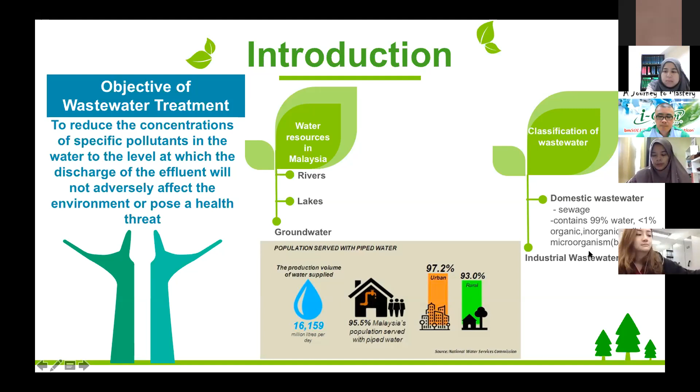So what is the source of water pollution? I've divided it into 4 main sources, focusing on Malaysia, but generally the trend is similar all over the world. The first is due to population growth, increase in commercial area, and urbanization. As population increases, especially in cities, more water is consumed, resulting in more wastewater produced. Besides that, more population means more solid waste produced, which ends up in landfills. Normally landfills in Malaysia have poor wastewater treatment, and most of the time the waste in the landfill leaches into underground water and surface water. This is happening currently in Malaysia, and it's very alarming.

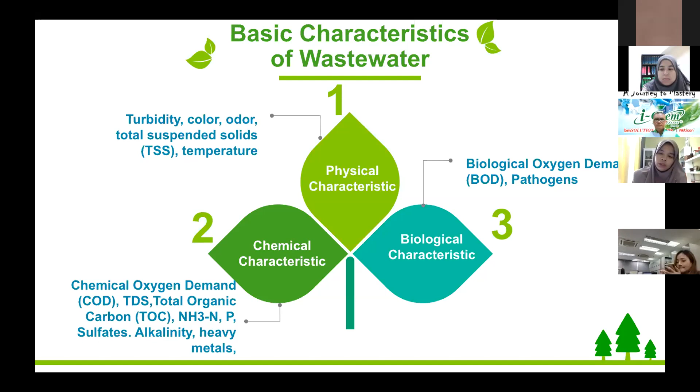So this is about the water pollution sources by sector in Malaysia. This data I took from the Environment Quality Report from DOE in 2017, which was released last year. In Malaysia, there are 5 main sectors that pollute the water.

The first one is manufacturing industries. Normally the characteristic of wastewater produced from this kind of industry includes heavy metals and high suspended solids. The second one is agricultural-based industry.

Like farming, and the use of pesticide and fertilizer. Normally this kind of wastewater has high COD, BOD, and nutrients. When we talk about nutrients, we are actually talking about the contents of nitrogen and phosphate. By having high nitrogen and phosphate, we know that fertilizers and pesticides, those kinds of chemicals used in agriculture, contain this high nitrogen and phosphate. This will cause eutrophication.

And then the third source comes from animal farms, especially piggeries. It has also the same characteristics: high COD, BOD, ammoniacal nitrogen, and also source of pathogens and nutrients.

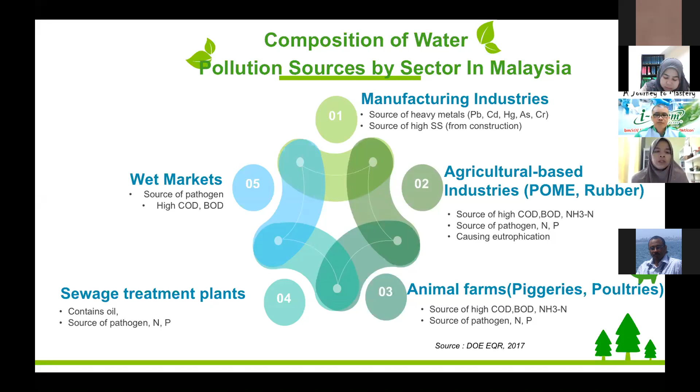So here we see some trends of suspended solid, BOD, and ammoniacal nitrogen loads that are produced by the 5 sectors I just mentioned.

We didn't realize the chemicals we use, the bleaching, the antibiotics that we took, all go to the sewage. And then transportation, oil and grease, heavy metals, especially during rainy days, all get washed off and go to the sewage. That's why our sewage is the main contributor to this polluted water.

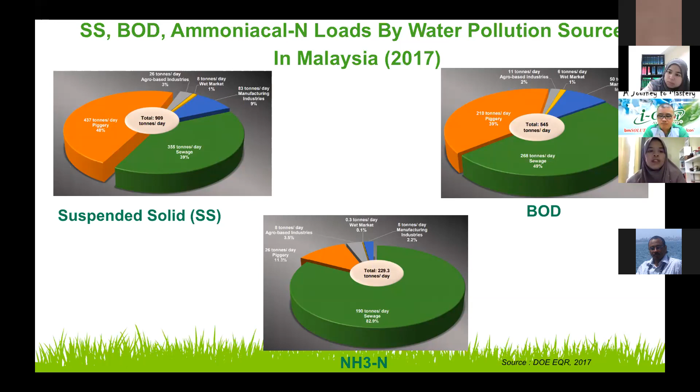So these are the challenges in wastewater treatment facing all of us, including the manufacturing industry, especially manufacturing industry. So there are five.

There are more, but these are the five main challenges in wastewater treatment. The first one, of course, is rising population, as I mentioned just now. The second one is climate change.

Malaysia has musim tengkujuh, rainy days, and this affects wastewater treatment. Wastewater treatment plants also use high energy consumption. The fourth challenge is complying with legislation set up by our government. The fifth is lack of appropriate technologies, which is faced by the whole world.

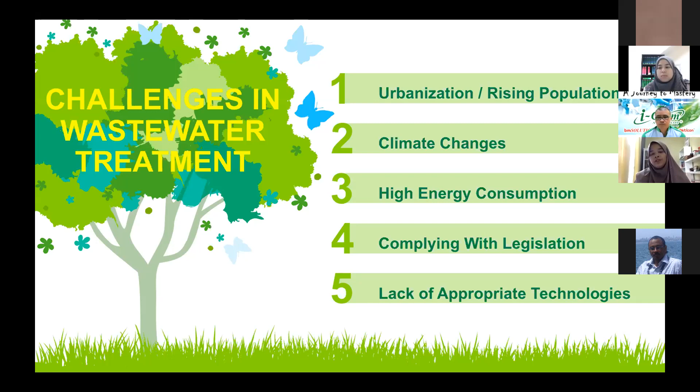So all these five challenges are giving you high costs. In the end, these five bring you to affect your cost, right? So I did some elaboration on all five challenges.

For the rising population, especially in urban areas, the city, with increase of people living in the city comes increased water consumption and producing more solid waste. When solid waste doesn't have proper appropriate treatment, it will end up in the landfill, and this is more dangerous. It will potentially pollute your groundwater. The groundwater in Malaysia as a water source is only 7%. It is expected that in Asia, in 40 years it will double, causing serious eutrophication.

So nutrients, the name is nutrient. We thought it's doing good to our water. No, nutrient in wastewater is nitrogen, phosphorus. This will cause eutrophication, and it will affect your aquaculture, fisheries, and water quality.

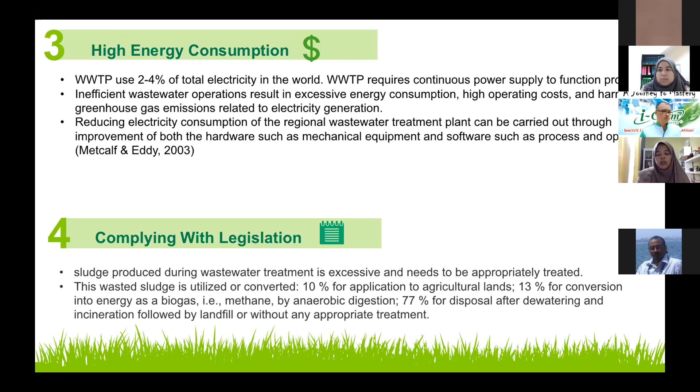The final challenge is lack of appropriate technologies, because some of our infrastructure in our wastewater treatment plants is outdated. It cannot cope. The effluent is double, but the technologies or the plant remain the same.

We also lack certified people, the competent person in operating wastewater treatment. This is not only faced by us in Malaysia, but all over the world, like India.

These are the impacts of poor wastewater treatment, like I mentioned just now. We are the main users - human, animals, and also for agricultural purposes. So all these will end up, human and animals will end up in sewage and go for wastewater treatment.

The agricultural side is also normally very rare to see - I don't have so much experience observing wastewater treatment plants in agricultural farms. But from what I've observed, they didn't have wastewater treatment, or if they have it, it's very poor. So they end up with all those fertilizers and pesticides used leaching to the underground water.

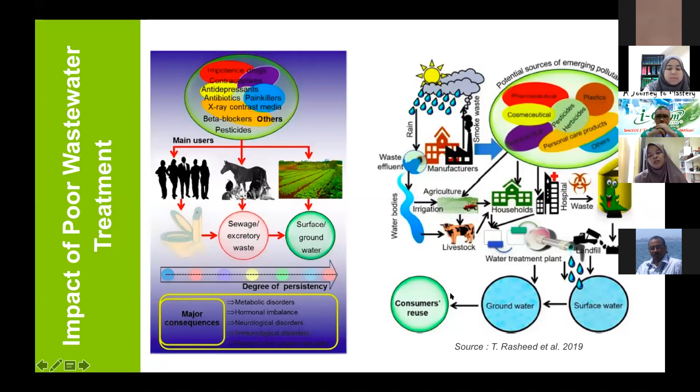Nowadays we have medicals, antibiotics, landfill leaching into the groundwater and surface water, agricultural runoff from animal farms - these are all causing water pollution. If you're not doing proper wastewater treatment, all these will go to our water resources, surface water, groundwater, and we are the ones who will be using the water.

Now the next one is the impact of wastewater: eutrophication. I've mentioned eutrophication earlier. Eutrophication is actually caused by the nutrients in the wastewater - nutrients like nitrogen and phosphorus. This nitrogen and phosphorus gives nutrients for the plant to grow, so we will have algal growth when you have more nitrogen and phosphorus.

When the algal growth becomes algal bloom - because the algae will use carbon dioxide and produce oxygen, and then when there's algal bloom, it will cover the water. This is what we call eutrophication: less oxygen, and that's where the quality of your aquatic life suffers - you will see dead fish. So this is not good.

So the next one - I have experience dealing with eutrophication in one of the process plants in Gebeng, where they had a problem of high pH in their facultative pond. When we saw it physically, the facultative pond was already full of algae. This indicates there's eutrophication existing in the wastewater. The source of the nutrient, phosphorus, actually comes from them using potassium hydrogen phosphate to prevent or retard scale formation and corrosion in their water distribution system.

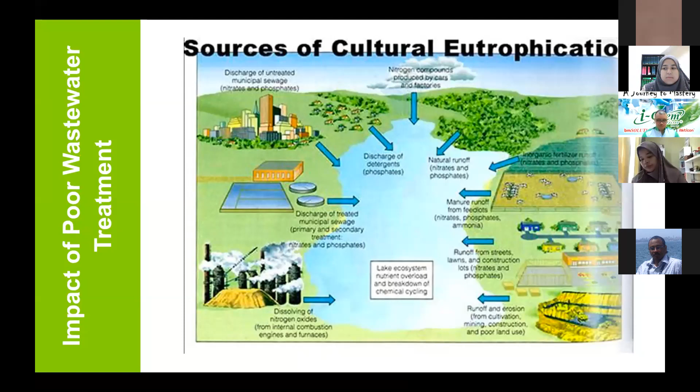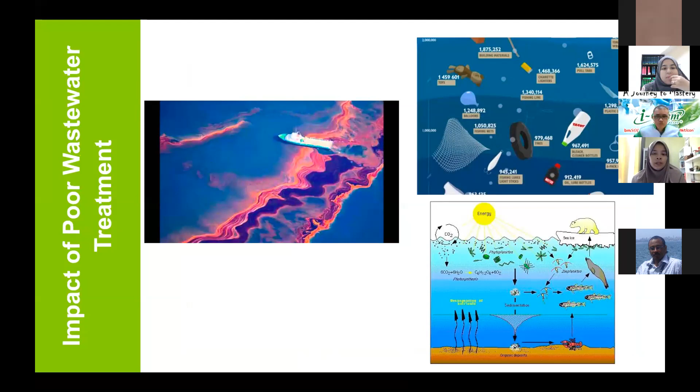These are another effect of poor wastewater treatment - if you can see, there's oil spillage. This sometimes happens, not often, sometimes might happen in the oil and gas industry.

So this is the basic wastewater treatment plant - this is just a basic one. Nowadays there's a lot more recent technology used to treat wastewater. Basically we divide it into three major parts. Actually, some of them have pre-treatment before the primary treatment, so it depends. But basically we have these three: primary, secondary.

And then the third one is how you treat your sludge, either before you dispose it in a landfill, or incineration, or you use it for other applications. Like I said, some plants have pre-treatment to remove large objects so that it will not damage the equipment, and then only they go to the primary treatment to reduce the fine particles, the suspended solids, and the grease.

In the primary treatment, if you see the settling tank, the solids will settle down, and this sludge will go to the sludge digester. The treated supernatant will go to the aeration tank - this is where we start our secondary wastewater treatment.

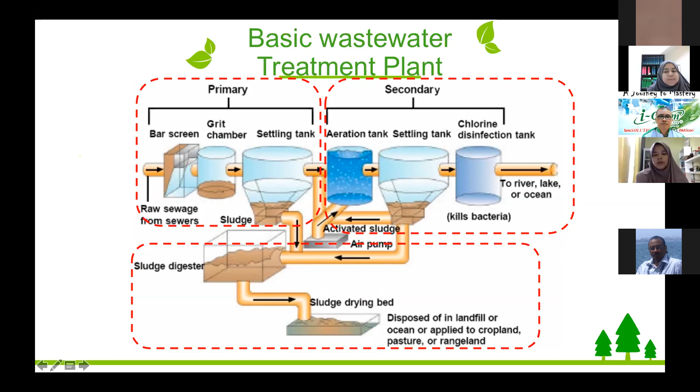Okay, so this sludge treatment will involve some thickening, stabilization, conditioning, dewatering, and reduction. So there's a lot of studies now on recycling back or reusing the sludge, to optimize the cost.

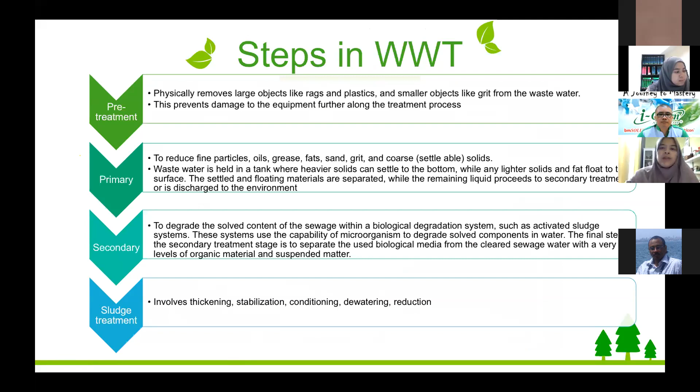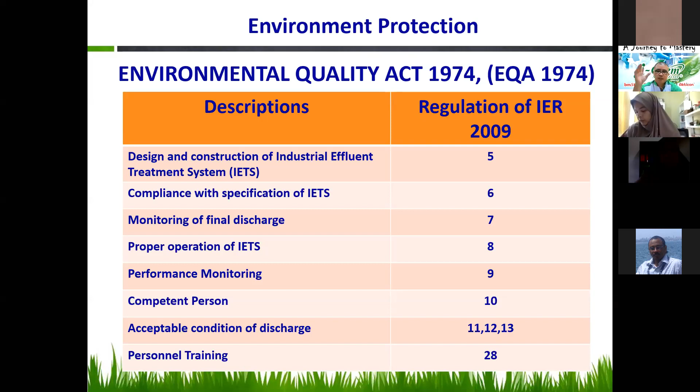But in the regulation of Schedule Waste 2005, all waste that falls into the schedule waste category must comply with all the regulations stated in this regulation here. I also highlight some that are quite related to our topic today.

The first one is regulation number 8, the responsibility of the waste generator. The factory or waste generator needs to ensure that all procedures of schedule waste management are in accordance with the DOE guideline. So when you produce wastewater and your wastewater produces sludge, when the sludge falls into schedule waste, make sure you follow the procedure.

And regulation 9 talks about storage of schedule waste. In this regulation, the factory or waste generator must follow the storage requirements for schedule waste, keeping the generated schedule waste not more than 180 days or not more than 20 metric tons.

And regulation 10 talks about labeling of schedule waste - the factory needs to label all schedule waste in accordance with the specification in Schedule Waste Regulation 2005. And in regulation 11, the waste generator needs to keep the inventory record for a period of up to 3 years from the date the schedule waste was generated.

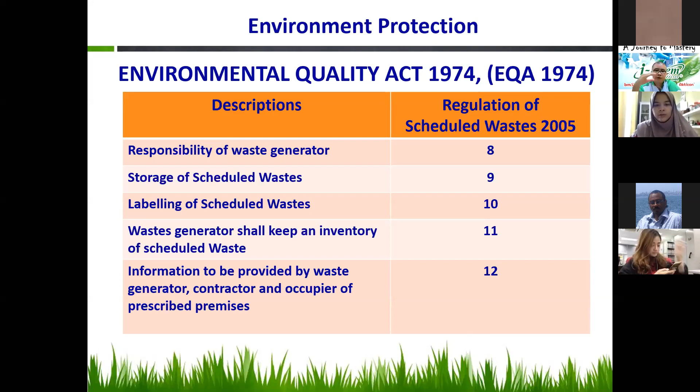Generally, there are a few proceedings that need to be carried out in industrial effluent management. These are the 4 proceedings that we always need to refer to.

The first one is the Industrial Effluent Characteristic Study, IECS, where we study the characteristics of the effluent. Second is the Industrial Effluent Treatment System design, IETS design. Third is the IETS operation and optimization. The final one that everybody is concerned about is the cost, so later I will share some cost-effective approaches in industrial effluent management.

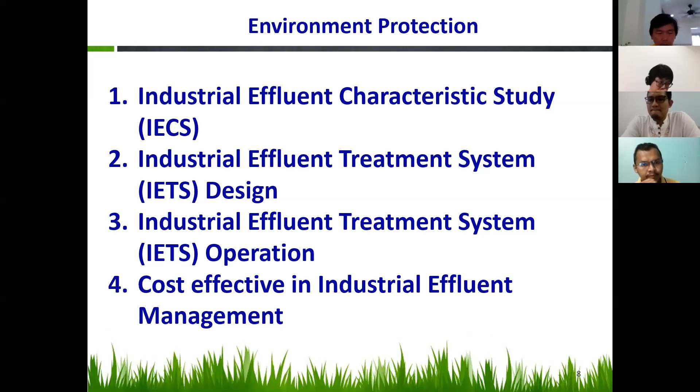All this testing can only be done by an accredited lab, accredited based on ISO 17025 under the SAMM scheme, Skim Akreditasi Malaysia. For labs that don't have this accredited certificate, we cannot use them for testing because they are not recognized by the DOE. So whatever IECS you want to do, make sure the lab you are sending the sample to is certified under ISO 17025.

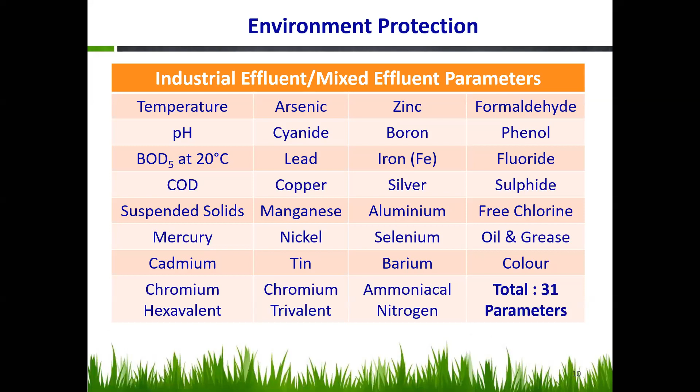Then the IETS will be designed based on the non-compliance parameters reported in the IECS report. When the testing is done, they complete this IECS report, and the consultant will select the non-compliant parameters. Then they use those parameters to design a system to comply with the standards stated in the DOE regulatory standard, according to the guidance document on design and operation of IETS.

As I mentioned, this document is issued by DOE, so all this design needs to refer to that guideline. I think almost everyone who goes for the competent person course will be provided with these two documents. This is one example of the ITS design calculation.

You can see all the unit operations like the aeration tank, air blower, primary sludge, biological sludge, and primary sedimentation. All these unit operations are calculated based on the factory specification and the flow they produce. They calculate each one by one for the entire IETS before moving to the engineering drawing.

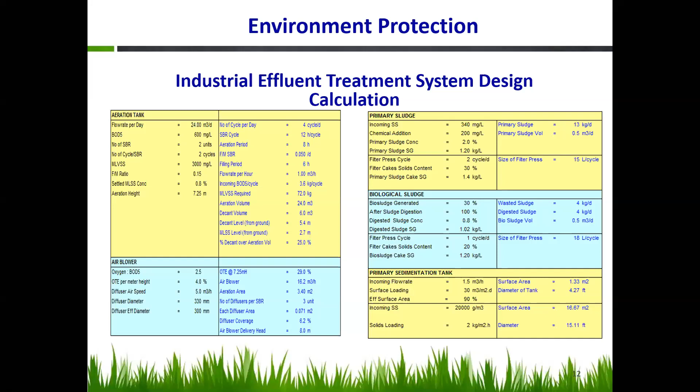Once the calculation is complete, the drawings will be prepared accordingly. This is one example of a drawing that the engineer will prepare, and this drawing will be used to construct the IETS. So this is our flow for this design and build process.

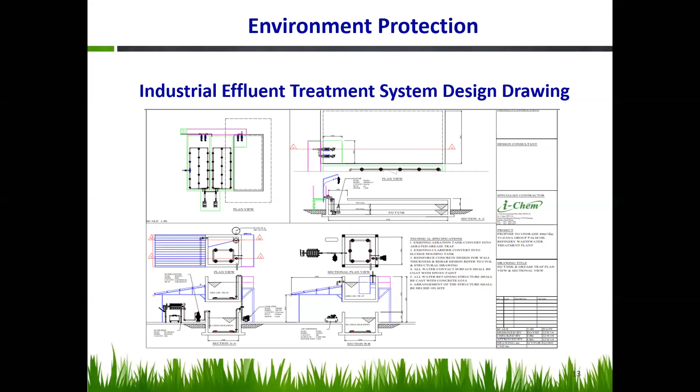After completion, the construction of the IETS needs to operate based on the system design specification and regulatory compliance. So the wastewater treatment system has been designed based on specification, then built. After building, it needs to be operated, so we need operation and optimization in this part.

In IETS operation, I selected 4 parts that are quite related to this topic. In ITS operation, the optimization of the entire ITS is crucial to ensure its effectiveness in treating industrial effluent for regulatory compliance. Therefore, performance monitoring of the ITS needs to be implemented by a competent person, assisted by the ITS personnel, especially the Environmental Performance Monitoring Committee, EPMC.

This committee, EPMC, needs to be formed in the factory and will be responsible for taking care of the wastewater treatment plant, led by the competent person. The EPMC needs to go through training by the competent person to make sure they are competent to do testing and daily operations in the ITS.

Prior to optimization of ITS, understanding the entire operation of ITS is needed to ensure it is well operated and controlled within the design specification. So when doing optimization, make sure the whole unit operation of ITS is understood - what systems are inside your ITS, because the various technologies or systems used are subject to your process flow.

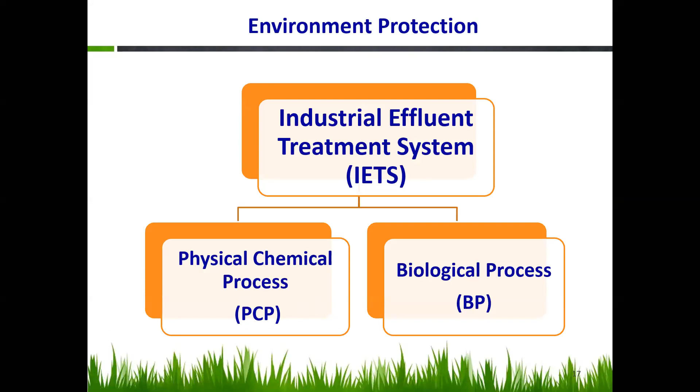In physical chemical process, PCP, the main function is to remove suspended solids through coagulation and flocculation using coagulant and flocculant. For those with a metal issue, normally caustic or lime will be used to precipitate the metal out from the influent. This is common practice in the industry for the PCP side.

For the BP side, the dissolved organic matter needs to be removed in this biological process, namely BOD and COD. This will be removed biologically by activated sludge, which consists of bacteria and microorganisms. So these are the two main functions, PCP and BP.

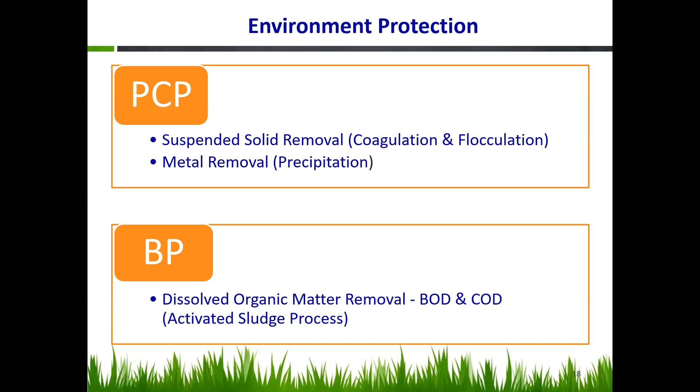From the design process flow, we can understand the whole operation of IETS and all the unit operations involved. This is very important because every unit operation has its own function in the entire ITS, eventually producing the final discharge that complies with the regulatory discharge standard.

This is most important. If one of the unit operations malfunctions or does not perform well, the whole ITS will be affected. So we need to ensure that all unit operations in the ITS work well consistently. You must understand the function of each one, how to operate it, and what the design limit is. Make sure not to exceed the limit - once you do, it becomes difficult to achieve high quality discharge.

So that's the typical flow process. The design depends on the factory process here.

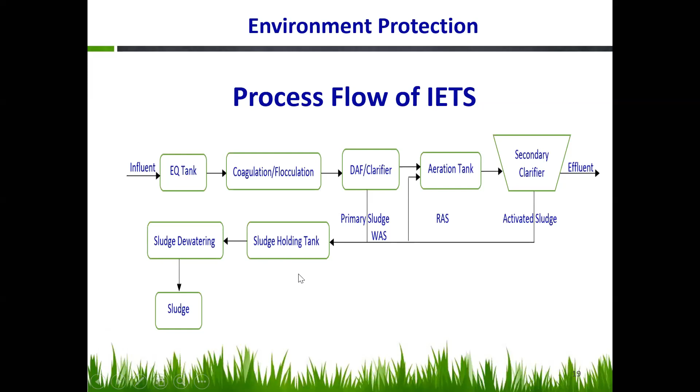In order to ensure that all unit operations are in good operating condition according to the design specification, a performance monitoring program needs to be implemented for the entire IETS.

This is one IETS example for a food processing factory. This is a food process factory, and normally they will have PCP and BP - physical chemical process and biological process.

Performance monitoring parameters for each unit operation are designed following the guidance document on performance monitoring of IETS issued by the DOE. Once we identify the unit operations, we refer to this document to determine what parameters we need to put into our performance monitoring. This is very important, because if you miss one of the parameters, it may become quite difficult to control.

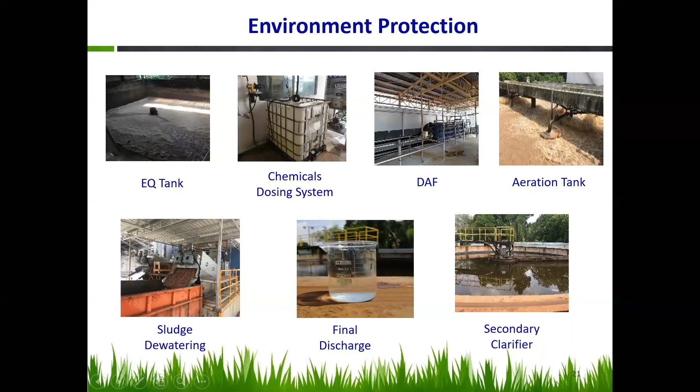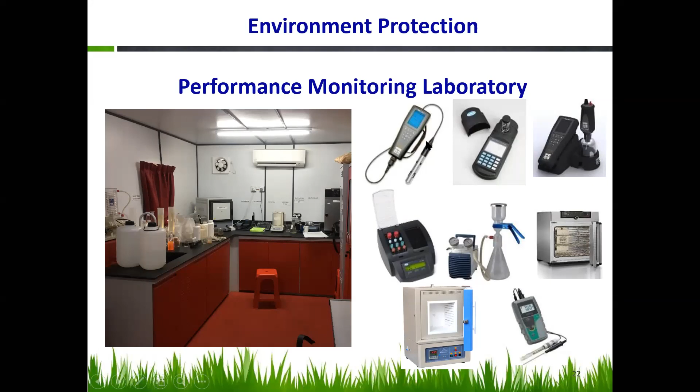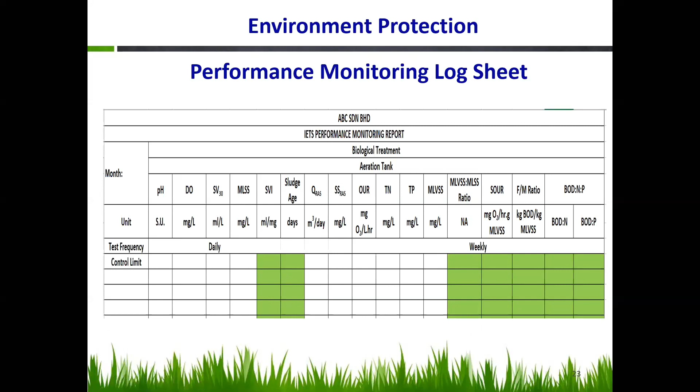This is another part called data management, for performance monitoring data management. Once the performance monitoring log sheet is completed with all the control limit values, then the performance monitoring control chart needs to be done by converting all the performance monitoring data into a graph plotting.

It's also mentioned in this DOE requirement.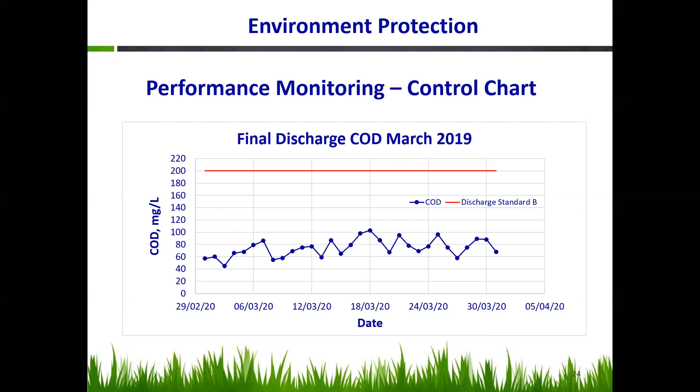According to the EQA 1974, the Environmental Quality Act 1974, a factory needs to select a person who is in charge of or supervises the operation of IETS to be certified by DOE as a competent person. Before the certification process, he or she needs to attend the training course conducted by EiMAS, Environment Institute of Malaysia, then complete all the course assignments and pass the comprehensive exam. Once they pass the exam, they will be awarded a 1-year pre-competent person certificate.

So within that 1 year, having obtained this license, they can operate the wastewater treatment, but within that 1 year they need to prepare the Field Training Report, FTR, for submission, then attend the professional interview conducted by EiMAS. This is the process of certification.

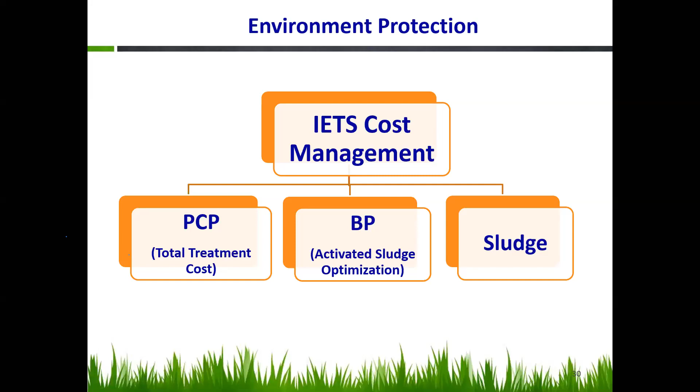Normally the main treatment cost of the entire IETS is in the PCP, where chemicals are used such as coagulant, flocculant, pH adjuster, and other chemicals in the primary treatment. In order to reduce the chemical treatment cost, manufacturers are always looking for the cheaper unit price of chemicals, but they don't really study the unit treatment cost. So what's the difference between unit price of chemicals and unit treatment cost?

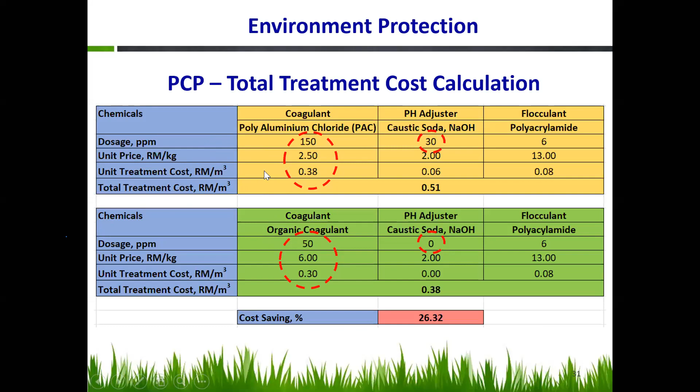As shown in this table, let's say I have two types of coagulants: one is PAC, polyaluminum chloride, and another is organic coagulant. For PAC, the price is about 2.50 per kilo, dosed at 150 ppm, giving a unit treatment cost of about 38 cents per meter cube. But when we look at the organic coagulant, even though the unit price is higher, about 6 ringgit per kilo, it's dosed at only 50 ppm, giving a unit treatment cost of about 30 cents.

So we can see that even though the unit price is higher, the treatment cost is less. This is very obvious - we can get a good cost saving. It's shown that even the organic coagulant at a higher price, with low dose and low dosage, will eventually lower the total treatment cost. This is how we do the costing for deduction here.

Moreover, when using PAC, the pH of the influent might drop, so you need to adjust the pH by putting in caustic soda. Normally in industry they use caustic soda to increase the pH. Indirectly, this incurs another extra cost for pH adjuster - about 30 ppm at 2 ringgit, so another 6 cents added to your entire treatment cost. But if you use organic coagulant, it will not affect the pH, so the pH adjuster is not necessary. You save that cost. But the flocculant dosage will be the same, 6 ppm.

So it clearly shows, from calculation, about a 26% cost difference by using organic coagulant with a higher unit price compared to aluminium with a lower unit price. This is how we do the cost saving. A lot of factories don't realize this - they want to buy PAC from Company A at 2.50, and Company B's PAC at 2.40, and on paper they say they save 10 cents, but in fact it's not, because maybe the dosage is almost the same. This is how we help the customer do cost saving in the wastewater treatment.

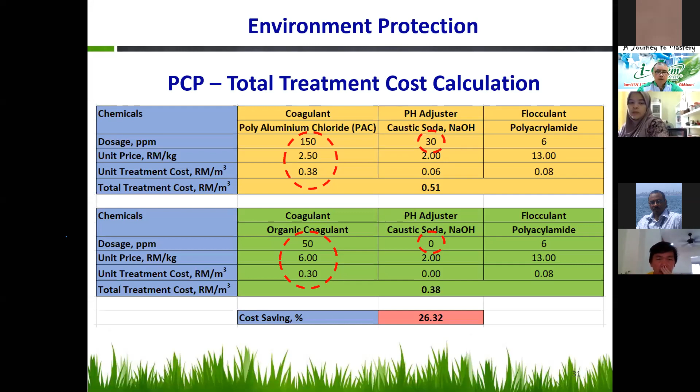In the biological process, effective cost management can be done by optimizing the activated sludge process, which is mainly used in the BP process. There are many methods to control and enhance performance monitoring in the activated sludge process, but today I'll share 3 methods.

The first one is sludge age, or MCRT - some people call it mean cell retention time, or SRT, sludge retention time. The second is F/M ratio, food to microorganism ratio. The third one is dry cell bacteria. So these are the three methods.

For the biological process, the first method is increasing the sludge age. When you increase the sludge age, the waste activated sludge (WAS) volume will be reduced, so your sludge volume will be less. This directly reduces the secondary sludge volume, and when you dispose of it, you also save on sludge disposal cost.

The second method is to increase the F/M ratio. If you increase the F/M ratio, it means the aeration tank is able to receive higher BOD into the aeration tank. When the influent has high BOD, it means that in front of your PCP you can reduce chemicals. You can reduce chemicals, then the BOD will increase, allowing you to operate at high BOD. This directly saves your cost in the PCP.

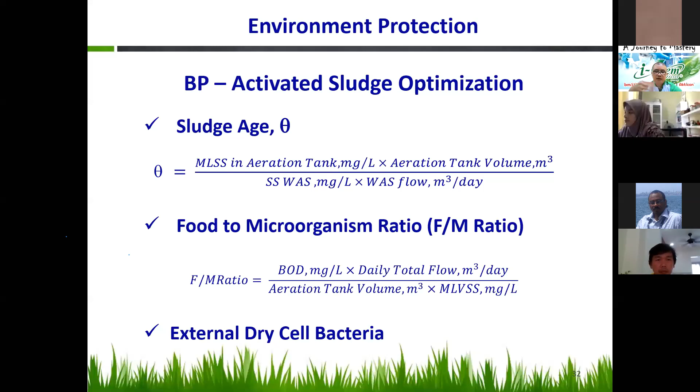And the last one - finally, effective cost management of sludge can be done by converting the inorganic coagulant in PCP. As I mentioned, if you use PAC - polyaluminum chloride, which is an inorganic coagulant - some use alum or aluminum sulfate, or ferric chloride, or ferric sulfate, we can convert all these inorganic coagulants into organic coagulants to produce non-scheduled waste.

For information, if any waste contains aluminium, it will automatically fall into scheduled waste with the code SW204. Once categorized as scheduled waste, you cannot simply landfill it - you need to follow the scheduled waste procedure, doing storage, labeling, and disposal according to the scheduled waste rules.

When you dispose of the sludge, you cannot simply landfill it - you need to send it for proper disposal, and you pay more cost. As a guideline, one of my customers charges 2,750 per ton for SW204, excluding toll and transport. So this is a high cost for scheduled waste, which is why we try to convert it to produce non-scheduled waste instead.

This can be done especially for the food and beverage industry. For those in food and beverage, we always recommend trying not to produce scheduled waste, but non-scheduled waste instead - it's easier for disposal and can save a lot of cost.